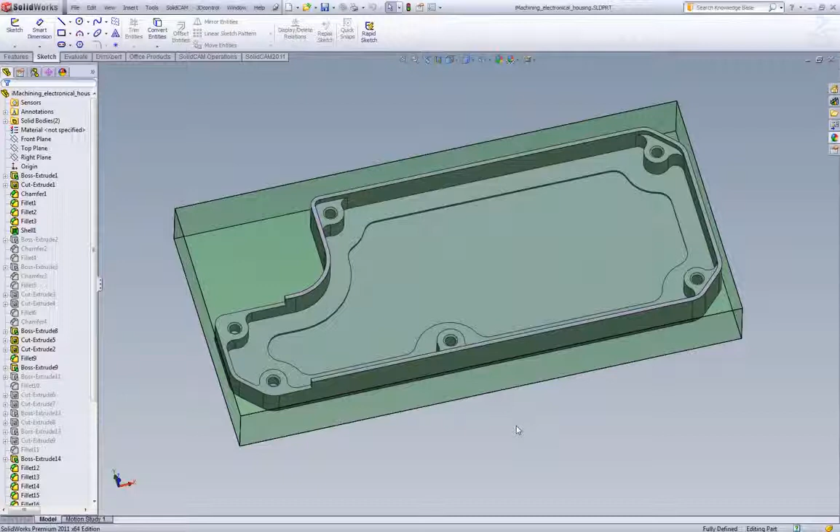So the first thing we're going to do is create a new milling project on this part.

We're going to define our coordinate system. It's as simple as picking on the face we want. I like to put my coordinate system on the back left corner, so I'll just shift it there. Then we accept all our default clearance levels.

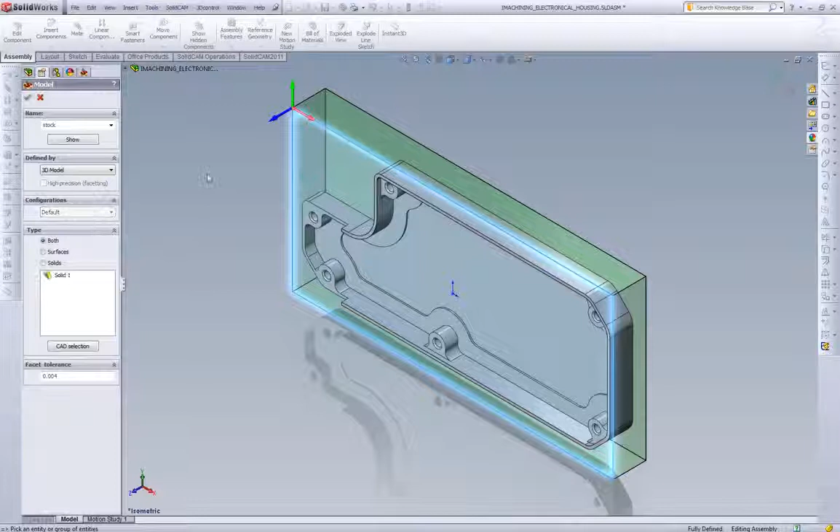We're going to define our stock. The default is a 3D box, but I already have my stock modeled, so I'm just going to pick it. Same thing for the target, I'm going to pick that off of the screen.

For iMachining, we need to pick our machine, so I'll pick our Haas VF2SS. For our material, we're going to pick aluminum, and we'll set our machining level to default to 6 for this project.

Now we have our part ready for iMachining, or for operation creation. So what we're going to do is make our iMachining operation.

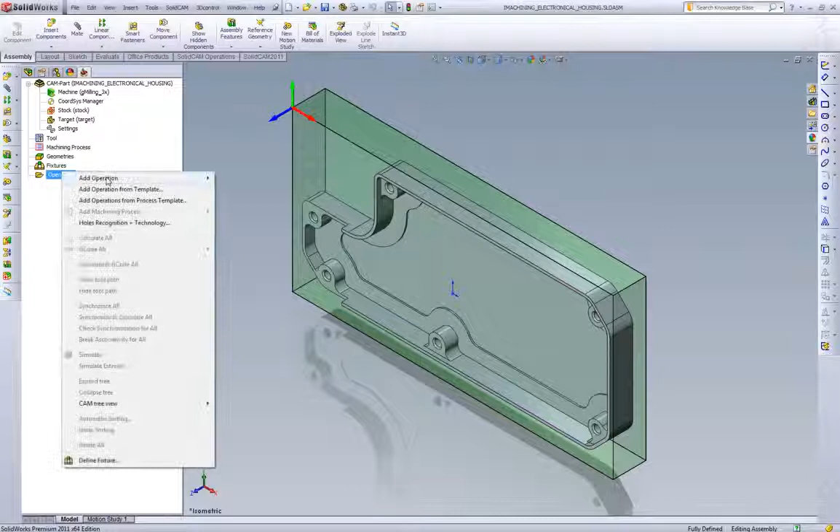When defining the operation, the first task is to define the geometry. I'll tilt this part down so we're looking at it as it would be sitting in the Haas. I'm going to pick this outside stock chain, and then I'm going to pick the part chain.

What I'm going to do is tell SolidCAM that that outside chain is open, it's going to change to black. This allows SolidCAM to know that is material and that it's able to plunge and machine from the outside, which is also where the stock is coming from. We're going to pick the bottom of our part, which we see is 875, and I'm just going to name my geometry outside.

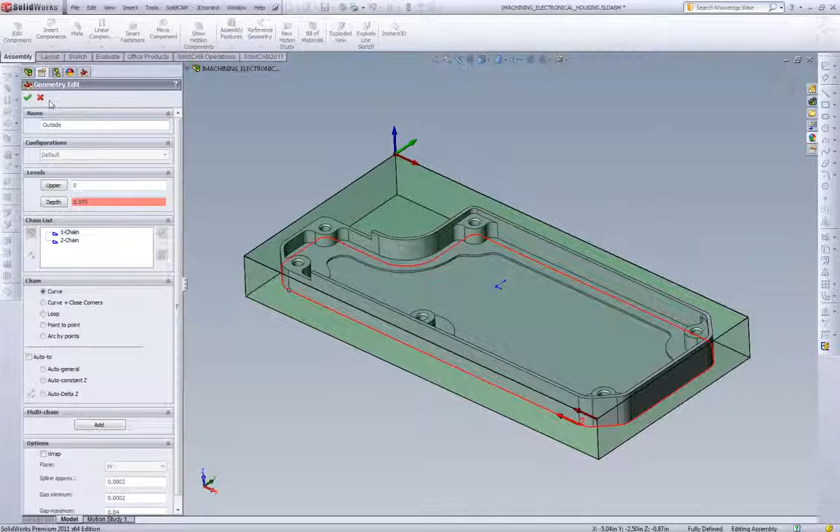Next, we need to define our tool. We'll define a tool from scratch and show how easy this is in SolidCAM. So we're going to pick a 1/2 inch end mill. We'll say the tool sticks out 1 1/4 inch, shoulder length 1 inch, cutting length 1 inch, and number of flutes is 3. We'll also throw a holder on this, so we'll go pick this 1 3/4 inch and select it.

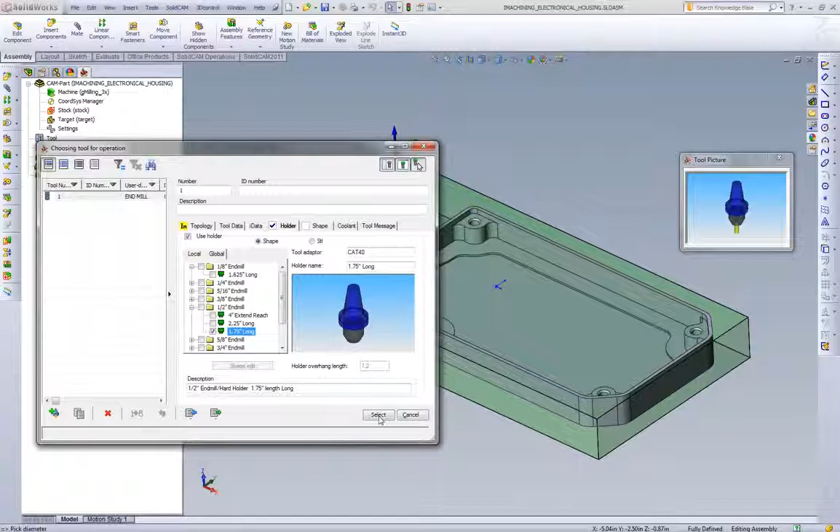Since we're machining the outside shape of the part, we want to go a little bit deeper, so we're going to go an extra 20 thou past the bottom of our part.

And what we can do now is just calculate the toolpath, and go to our simulation. What I'll do is play through this one time first, and then we'll talk about what the toolpath is actually doing.

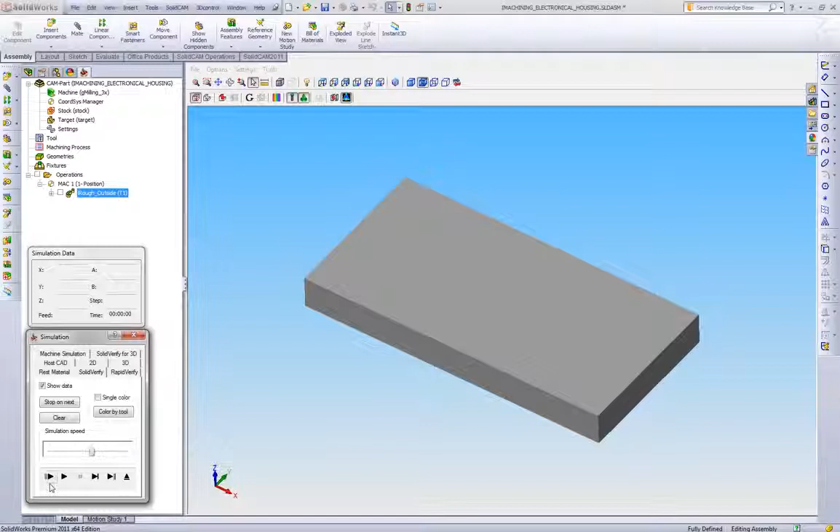So there's the toolpath to machine that outside shape. We'll play this in SolidVerify so we can see what it looks like removing the material. Then once it's finished, we'll go back to the wireframe toolpath and show what the different features of the toolpath are.

Okay, so the first thing we want to talk about with iMachining is what are the main goals we're trying to achieve. The main goal is to do morphing spirals. A morphing spiral is a spiral that is not circular, but done off of a shape. We call it morphing because unless you have a perfect circle, there's no way to make it go to some other shape. So we work between a range of minimum and maximum step over, allowing us to morph to any geometry, not just a circle, and create a spiral which keeps the tool in contact the entire time.

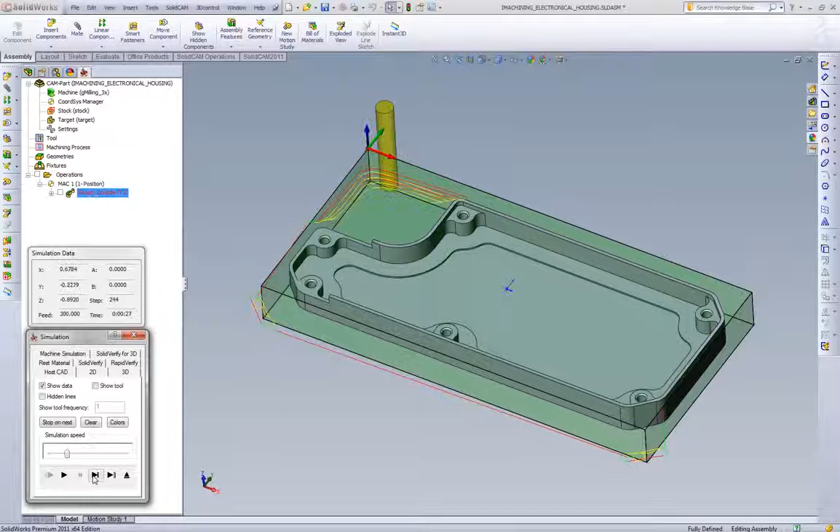So what we'll do is play the beginning of this toolpath, and what we'll see is that on this outside shape, SolidCAM is first preparing the corners. If we look at a top view, it'll help explain what we're looking at.

The areas where we have the most amount of material are the 4 corners. In the corners where there's the least amount of material, it only had to do 2 passes. In this area where we have a lot of material, it's actually going to do multiple passes. What it's doing is preparing to do a spiral. Since there's no way to do a complete spiral on this with having the tool in contact all the time, we prep the material - we're prepping the outside corner.

As soon as we're done with the outside corner, then we're going to go to what we call our morphing spiral. Let's play through 2 loops so we can show something here. There's the first loop, and here is the second loop.

Now what we see here is SolidCAM's morphing spiral. In the area that has the least amount of step over, or the least amount of material, we have the smallest step over. In the areas where we have the most amount of material, we have the biggest step over. So we work with a degree of freedom within our range of step over, and this gives the tool the ability to do morphing spirals while keeping the tool in contact the entire time.

As we look at our feed rate, we'll see SolidCAM is also doing feed rate adjustment. In the areas where there's a smaller step over, we're increasing the feed rate to maintain efficiency. As we single step through this, we can see on the thin areas it goes to 256 inches a minute. As we come to the thick area, we can see the feed rate slow back down to 147 at the thickest point.

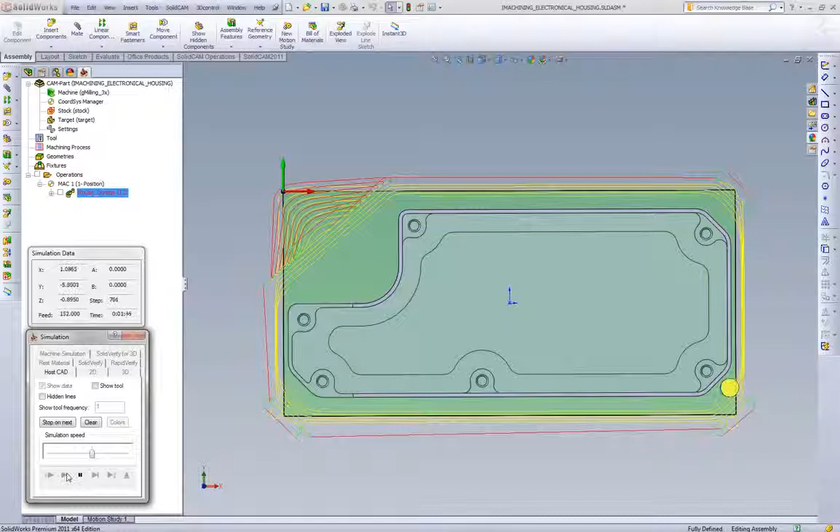Continues doing the spiral toolpath, and then at the end, it'll then go and clean out this internal area over here. Now some things to note when we look at iMachining from a side view. There are no retracts. None at all in this toolpath. There's only the one entry and the one exit. So SolidCAM is able to keep the tool down in the pocket and not have wasted machine time rapiding around the part.

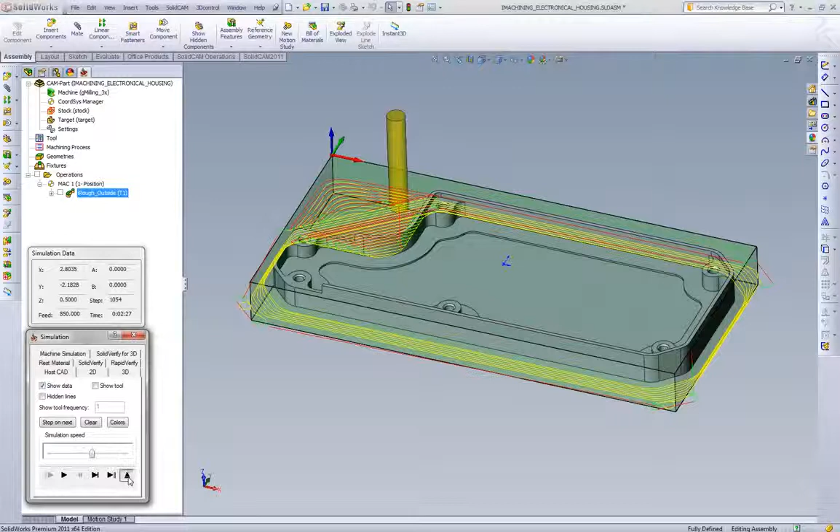Now that we went over the toolpath, we want to go over the technology wizard. What our technology wizard is doing is it's actually creating all of the cutting conditions for the toolpath to follow. Feeds, speeds, step overs, depth of cut. How we've created the technology wizard is we've done 3 years of live testing on a complete range of tools, complete range of machines. We've done testing all the way down to .040 end mills in hardened steel.

We've done titanium testing. We've done steel, stainless steel, aluminums. We've used all sorts of different size tools with 2 flutes, 3 flutes, 4 flutes, 5 flutes. We've done different machines. We've tested on Haas's, Mazaks, Hurcos. And what we've done is we've developed an algorithm that ties all of that information together.

What we're not doing is we're not creating an Excel database of feeds and speeds like many people have tried before. What we're doing is we're actually creating an algorithm where we look at, okay, we define a machine that has a certain maximum RPM, feed rate, etc. Then we have a material which has certain physical properties to it, and then we also have our end mill, which has so many flutes, it's a certain diameter, it has so much flute length, it even has pitch for the flutes. And then what we do is we devise a cutting condition for that specific condition.

So what we'll do is we'll look here and see what we get in the technology wizard page in SolidCAM. What we have is a 3D solid that is showing this step over and this cut for this pocket. The main thing with iMachining is we have this machining slider. What this does is it allows us to go from level 1, which is very safe feeds and speeds and step overs, to a very aggressive feed and speed and step over.

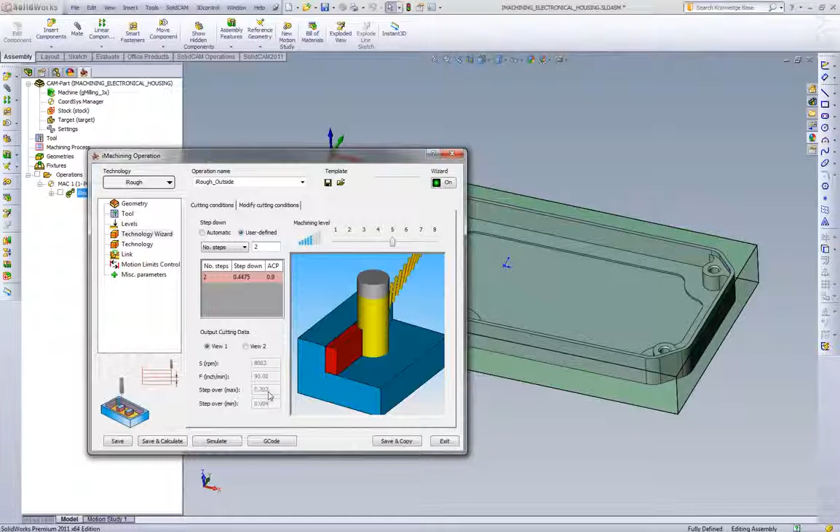Now what's important to note here, as I said before, is this is not an Excel database of feeds and speeds. So let's say, instead of doing this in one cut, which we're doing is 895, let's say we wanted to do 2 depth of cuts. What you can see is SolidCAM is adjusting everything based on what depth of cut we're doing. We can see the step over jumped from the 126 to the 207. If we go back to 1 depth of cut, we can see the 126 at 895. If we do 2 depth of cuts, where we're cutting 4475, we go to 207.

So in this manner, we can see that iMachining is being very intelligent, and it's trying to adjust for all of the conditions that we change. So every geometry you pick, every depth of cut, every tool that you pick, we're going to adjust feed, speed, step overs, and make sure all of them are synchronized and perfect the entire time. And then we have our machining slider, which is giving you, the machinist, the freedom to pick what works the best. As we know, we can achieve great things.

But to achieve high feeds and speeds, we need to have all the right things set up. We need to have the perfect fixturing. We need to have the perfect tooling. We also need to have the perfect tool holders. So what this does is this gives us freedom, and what we do is we get less cutting force and those types of parameters as we go less in the machining slider. So if we know our part's not held very rigid, we can pick a low machining slider.

Let's say it's not very rigid in the machine, just because the machine is not very rigid, we can go slower. If we're doing a prototype part, we can go slower. Generally, most of our customers are going to work in the 3 to 6 range, which is just average. But if we know we're holding good, we can go high. And if we know we're holding not so good, or we're having tough times with chip evacuation, or not good coolant in the machine, we can go down to the low end.